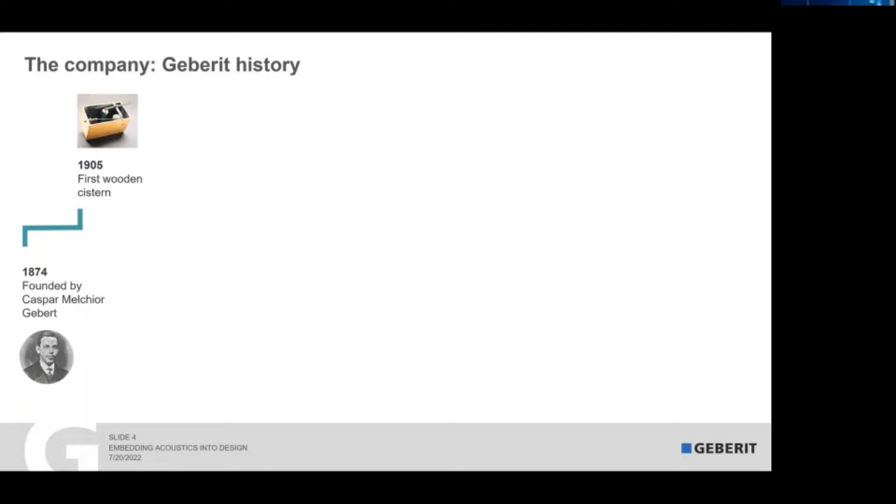Now, I'll take a little bit of time for Geberit history here. As we see, the company was founded in 1874, so we have experience of more than 100 years in the sanitary field, and it was founded by a gentleman, Caspar Melchior Gebert, and then we are the first inventor of the wooden cistern. After that, we had a lot of other developments.

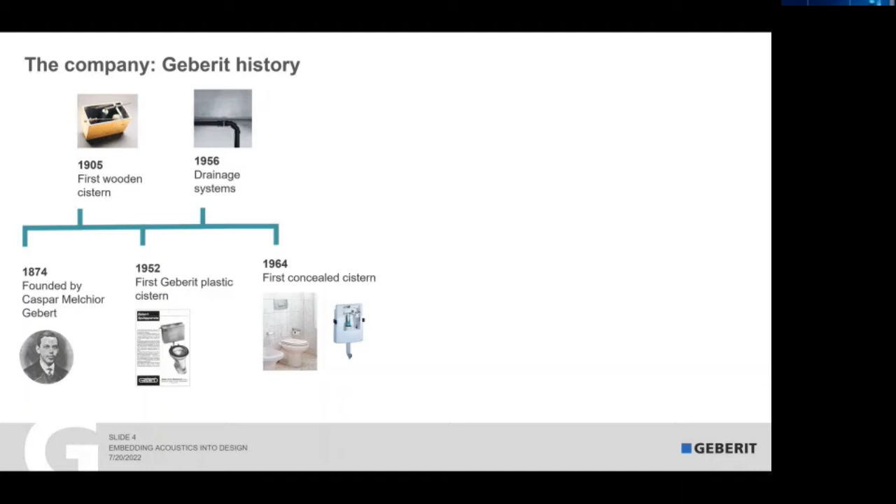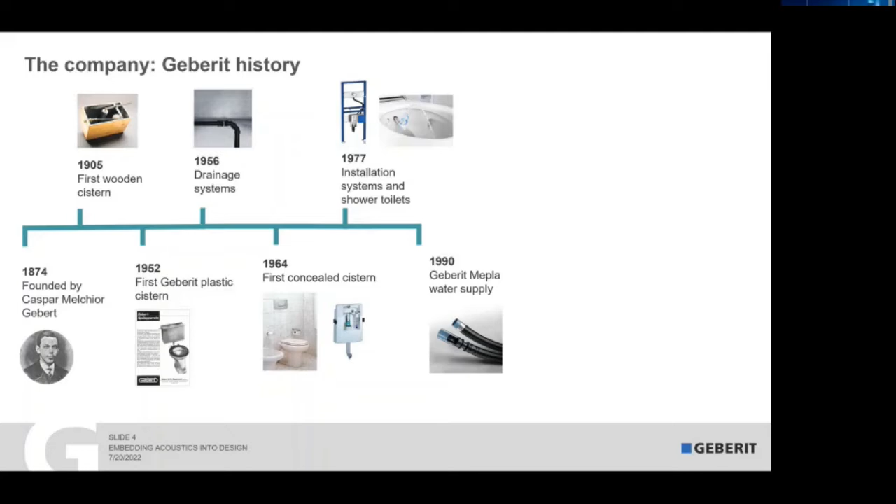Then in 1956, we had a development for drainage systems, then the first concealed systems, and we are proud to say we were the inventor of the first plastic concealed system also. Then a lot of other innovations in terms of installation, shower toilets, water supply systems, stainless steel pipes and fittings, then Geberit Monolith, sensor-based toilets, bathroom, and other products.

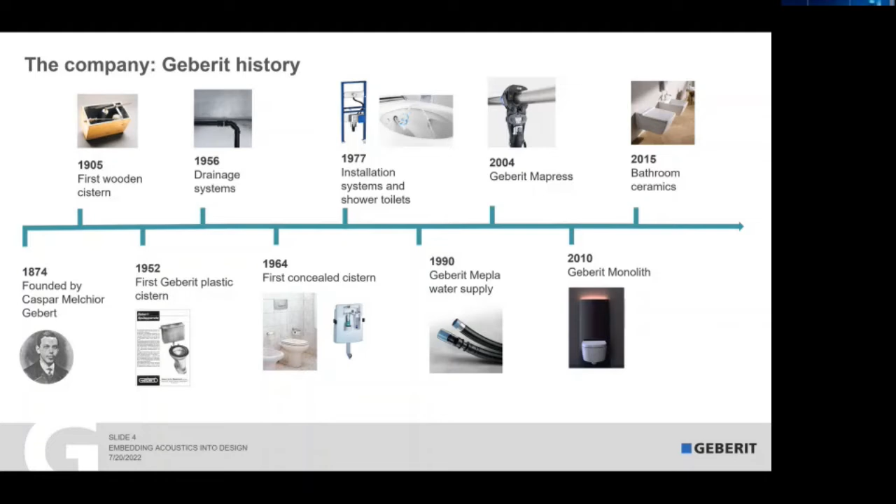So the topic what we see here, nowadays in this region there is more demand for that. And today, what we will discuss is more on the statics and sound insulation part. So this will be a very useful session for us today, where we can see the optimal value of sound, what it could be in a residential apartment or commercial or healthcare building.

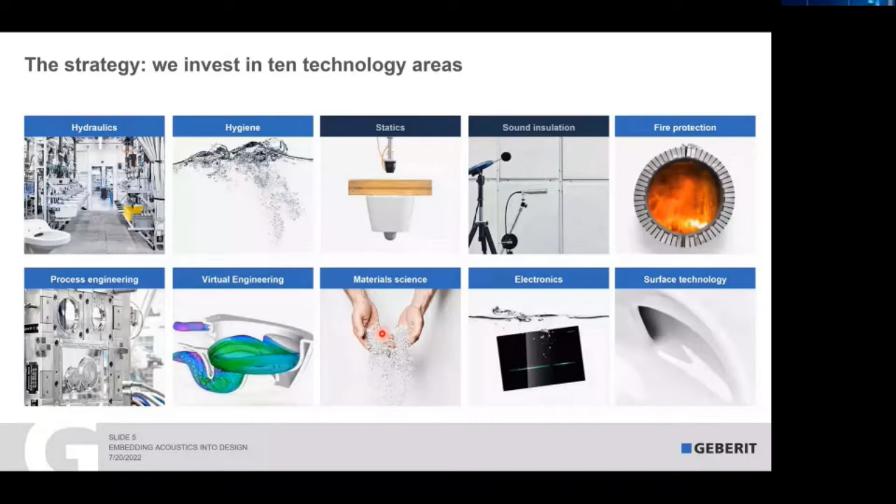Generally in our region, as we know, people speak about several values, less than 20 dB, more than 20 dB, etc. But exactly what is the requirement as per the standard and as per municipality regulation here in this region? We will see more on this part from Mr. Mathias.

One thing I would like to bring to all of your attention is we have a Geberit sound laboratory next to our factory in Switzerland. We have operated this sound laboratory since 1997, more than 20 years. So we have invested heavily in acoustics and fire protection technology for many years.

So now with this, I would like to hand over to Mr. Mathias, where we will learn and see a lot of things in acoustics, which will be useful for our plumbing design segment. Thank you so much.

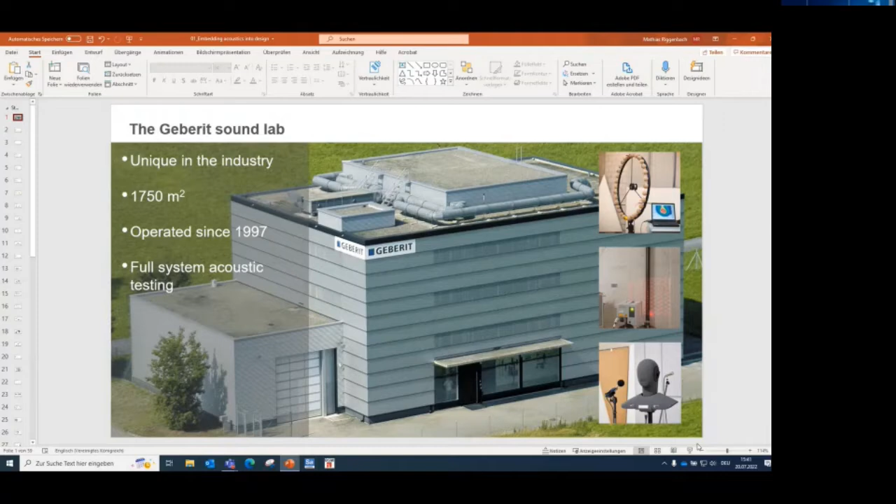Okay, thank you very much for the introduction, Vinit. I'm going to just go to presentation mode. I hope everybody can see my presentation. Is that right? Yes, all good. Excellent. We can see it. So thanks for the excellent presentation of Geberit, Vinit.

I will continue and hopefully give you some valuable insights on the acoustic topic. As Vinit said, this laboratory is very important for us, and there we gained most of the values and experience when it comes to acoustics. So we have huge knowledge and a huge database when it comes to different systems, different installation regulations, and so on. That's, I think, the most important part, where we can gain all the knowledge.

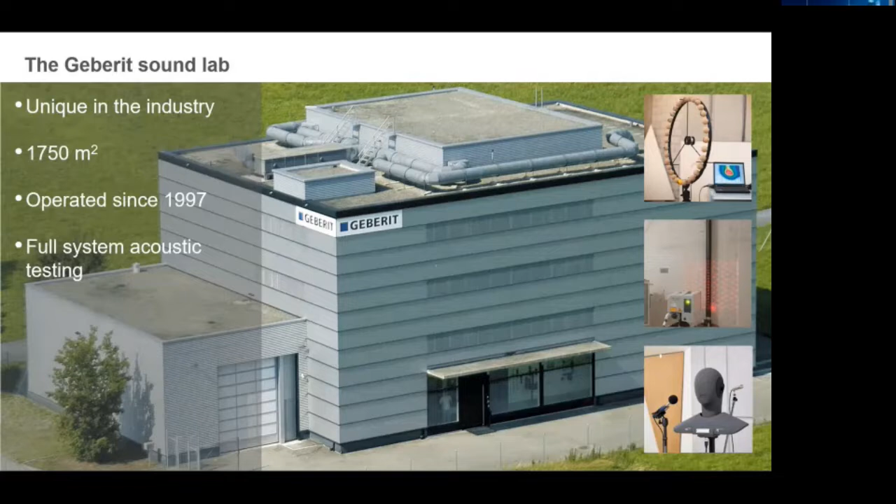So the introduction to Geberit was already done. I want to talk a bit about the basics, so what causes noise, about the dBA level, where it comes from. Then, of course, one of the most important topics, the importance of acoustics in design. The design stage is very important. Architects can do a lot already for acoustics and save us a lot of headaches if they make a good layout of the buildings. And this is one of the parts I would like to address heavily.

And then we will go into the designing, and also some installation situations which are reality or which are good, and maybe some which are a bit less good. And then, as we already said, the acoustic regulations we will have tomorrow, to not make it too heavy, everything in one webinar. So we split it a bit, so it is also quite easy to digest for you.

So when we start, what is sound? What is it actually? It's measured in decibels. I think everybody has heard of decibels. And then the frequency is also very important. This we measure in hertz, and this is basically the length of the sound. Those two values together give the sound. I will play you an example where you can hear that the sound is different. It starts low, and the more we increase the hertz, the sound is changing. So I'm going to play you this example here.

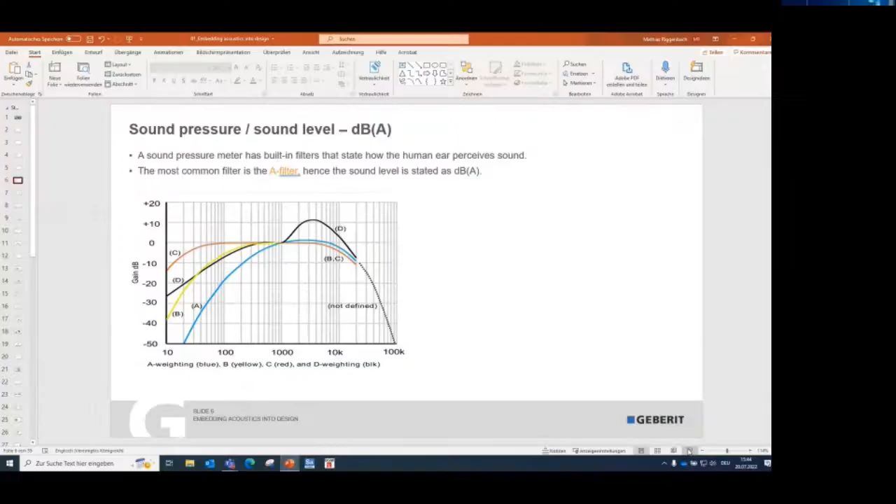Mathias, we are not able to hear the sound of this. Okay. Sorry, I'm going to share. You are not hearing the sound? Still not? No, actually. Okay, I'm going to share again. Sorry for that. If you don't hear, it doesn't really make sense. So I'm sharing again. I think I forgot to include the sound. My bad. So I try again. Now it should work. Yeah. Sorry for that.

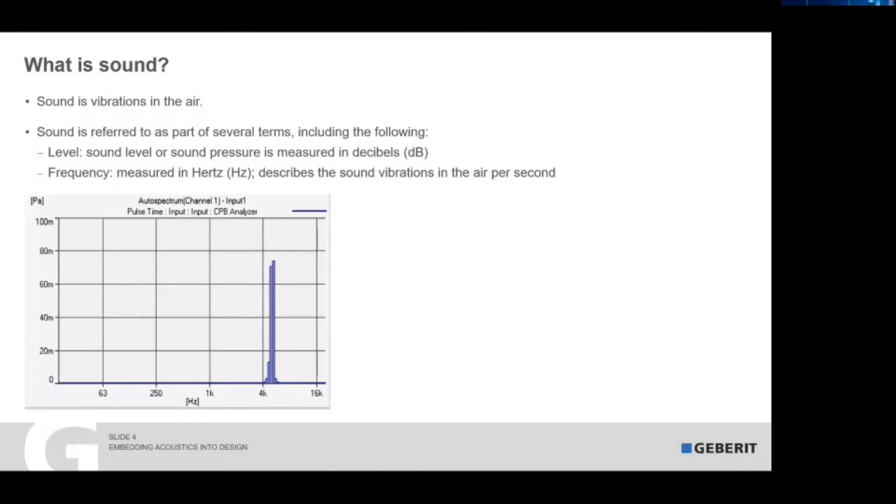So you can see the pressure of the sound and then the hertz, which is changing depending on the range the sound is playing. And of course, the perception for the human being is different when the sound is playing at different hertz. So this was a single sound. On the next example, I would like to play you some sounds which are more familiar to you. You see the dB value will be more or less on the same level, but different hertz spectrums are involved. So you will perceive the sound differently.

Maybe one of the most annoying ones. So also the last one I think was quite annoying. The sound is not what you like to hear, and you see already with the higher sounds, when you have the higher hertz, you perceive the sound a bit differently.

And when we talk about building installations, if it's aircon or pipes or windows, facades, we always talk about this dBA level. I think this is also familiar for everybody. We don't talk only about dB. So this dBA value is an A filter which we use to adjust it to the human ear. The human ear, how it is built, perceives the sound a bit differently.

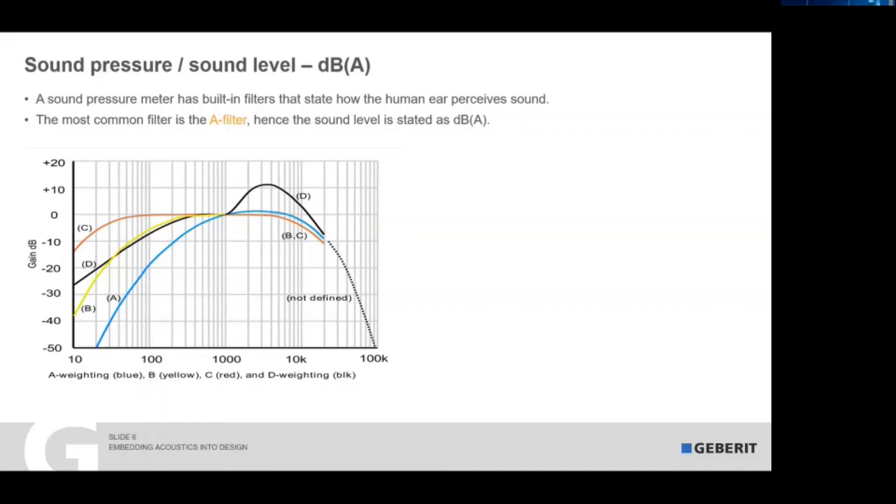Also important when we talk about this noise barometer: for example, with a pneumatic hammer we talk about sounds of 100 dBA, which already have an effect on the ears and could even cause damage. But when it comes to piping installation, drainage installation in buildings, we mostly talk about values around 30 dBA.

We will see this more tomorrow in the regulations, but I can tell you already, most regulations have different stages, but mostly we talk about values between 25 and 35 dBA. Everything below is not or seldom disturbing, and values below 20 dBA are very difficult to hear, even at night when you try to fall asleep. Values below 20 dBA will not disturb anyone when you are quietly at home.

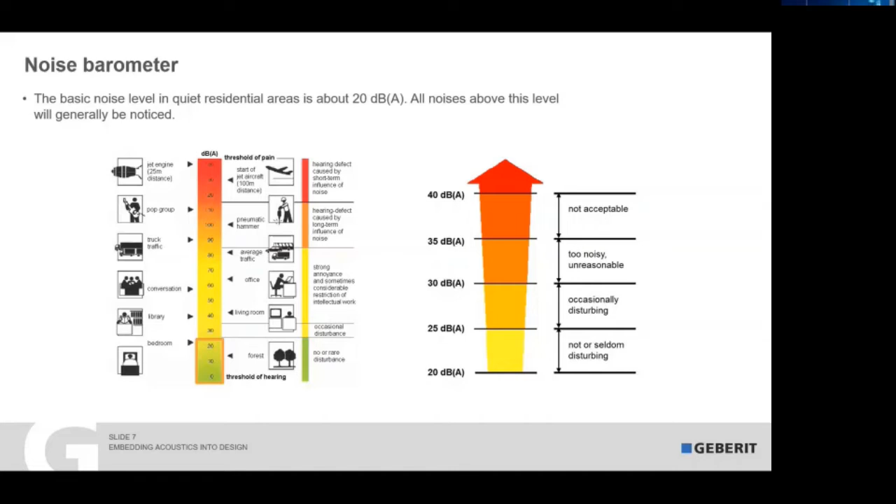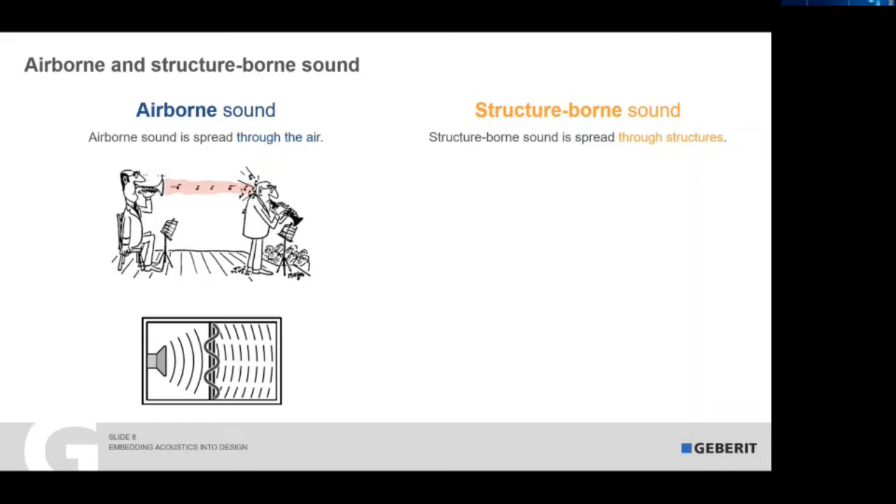So these are some basics which are very important to know, especially this noise barometer and the dBA level. Then also very important, we distinguish between two sounds: airborne sound and structure-borne sound. The first one comes through the air. When I'm speaking or playing an instrument, like the person in the picture, it spreads through the air and reaches another human ear, who then perceives the sound. So when we make a noise in one room, it will go to the wall, vibrate, and then go on to the next room.

Structure-borne sound is more when, for example, we walk around in our home and we have a neighbor below, and hopefully there's good insulation, good decoupling from one floor to the other, so you don't hear when the children or the women with high heels are running around. You should not get disturbed in your flat, or when there's a renovation above with a hammer. So the better the structure-borne sound insulation, the less you hear. This is very important to distinguish when we talk about acoustics.

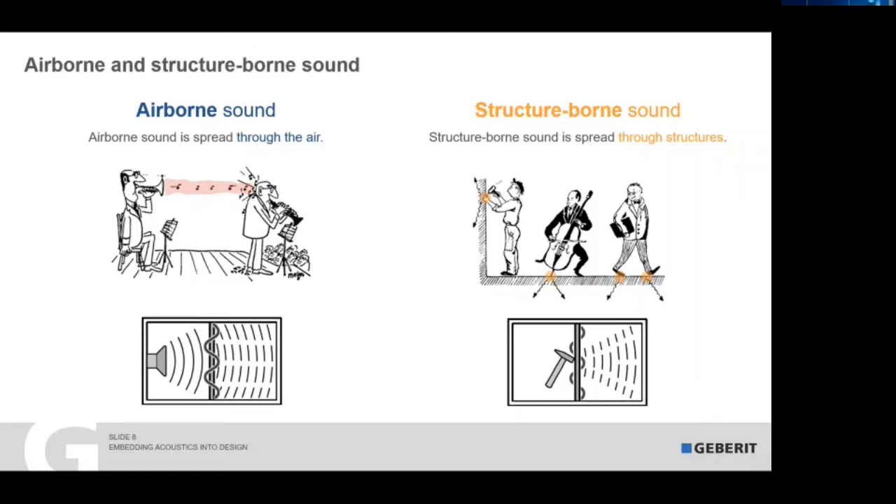Your neighbor next to you, or even in your own room, or the neighbor below, will hear structure-borne sound. The structure-borne sound is distributed over the building, and as I said, it really depends what systems and insulations you use; this has the biggest effect on the sound which goes to the neighbor. The airborne sound is mostly for your own ears when you are standing in front of the toilet, and the structure-borne sound is mostly for the neighbors.

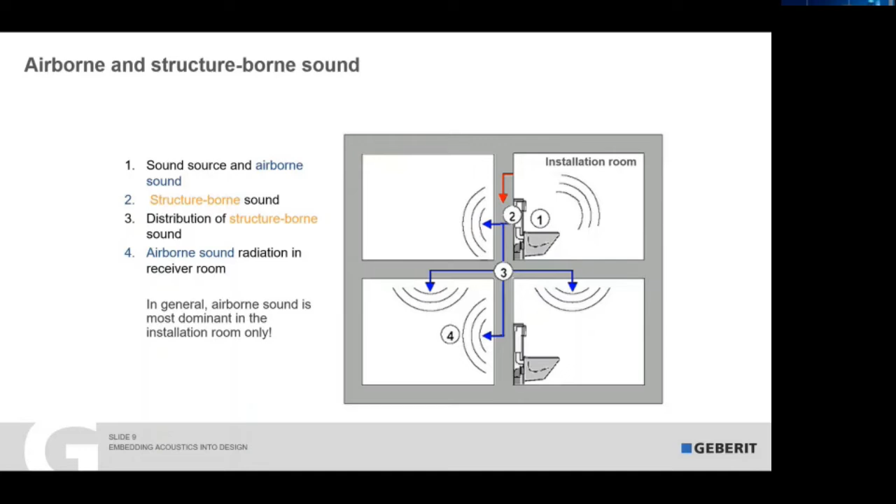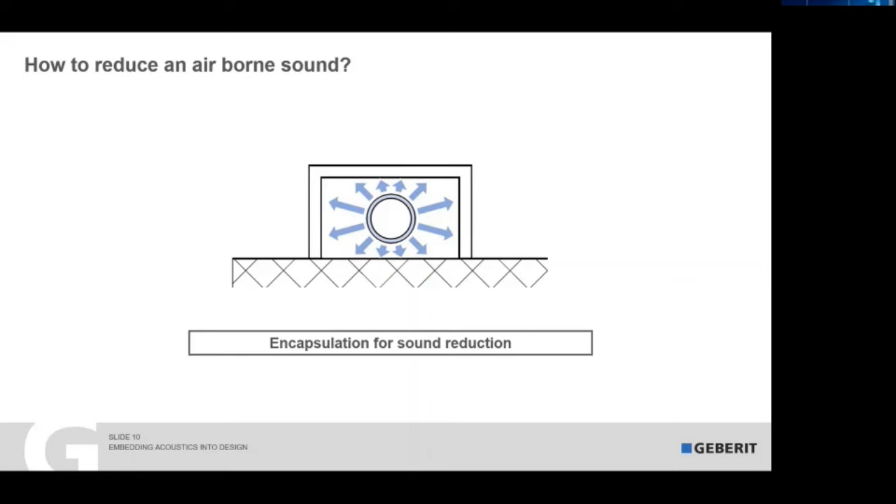So how to reduce airborne sound? Mostly we have a duct, maybe with a pipe. What is easiest to do? Of course, we put some duct around, and then we do not hear the noise in the room. And this is what we do mostly also with a pipe. We put it in a duct, and then the sound will be reduced.

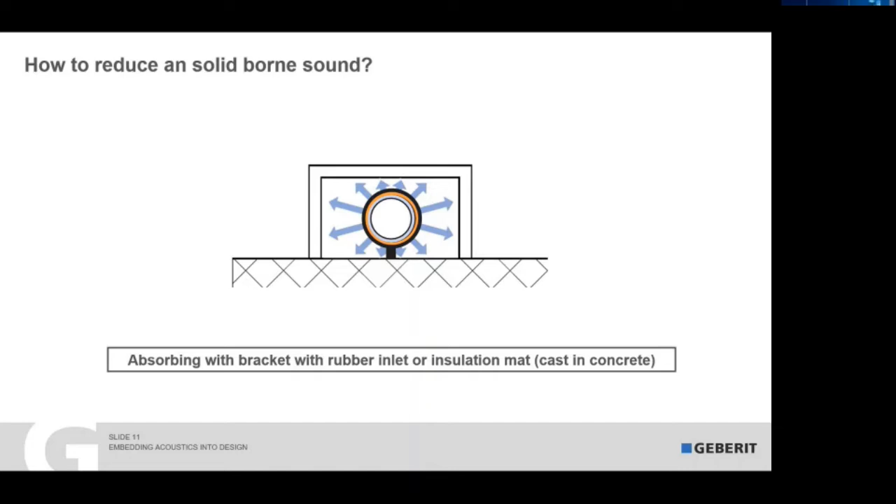So then also a good question, what is noise? Also this one depends. For example, the first sound which I'm playing you here, a Formula One car. If you like Formula One and you like the cars, this is maybe a pleasant sound for you. But of course, for people who do not like the sounds, or the street in front of you where the trucks are passing, this is not a very pleasant sound. And of course, it's also mostly the loud sounds that are not very pleasant.

But also we have the second sound, which is maybe familiar to everybody when you have been to the dentist. This sound is a bit lower, but it can be also very annoying when you hear it, because it's also what you associate with the sound. That's also very important, the loudness of the sound and also what you associate with it.

Then, of course, the last sound, I think everybody has heard, the toilet flush. There, mostly you will have noticed it's not very loud, but when you hear the sound, maybe you associate your neighbor going to the toilet while you have a nice dinner, and this sound is not very nice to hear at this stage. Or you just try to fall asleep, everything is quiet, your neighbor is flushing the toilet, and this sound can wake you up.

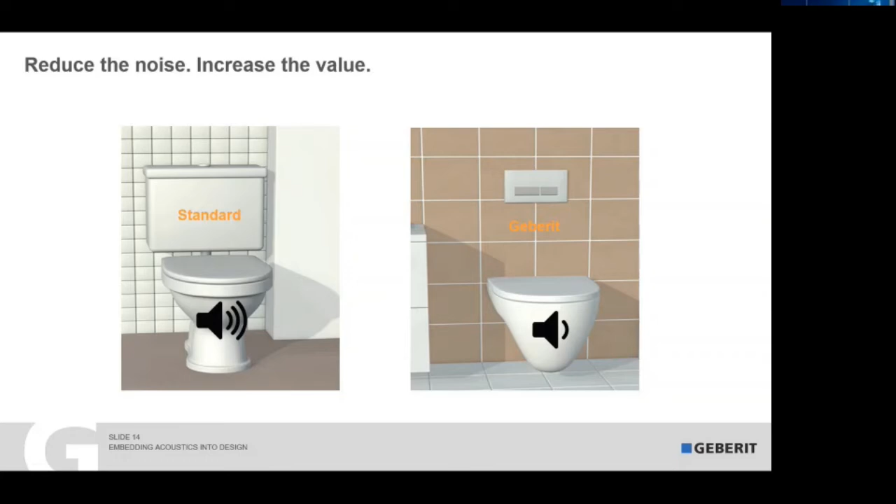Quite some time ago in Germany, we made a questionnaire about the annoyance of sanitary noise. Of course, nobody likes it. Everybody has been disturbed at least once or twice by sound. Sometimes we get asked, okay, I want to have it as quiet as possible. And of course, the more quiet, the more expensive it gets when we talk about the acoustic value. So if you have increased requirements, it's a bit the question of money and how much you would like to spend on your acoustic installation.

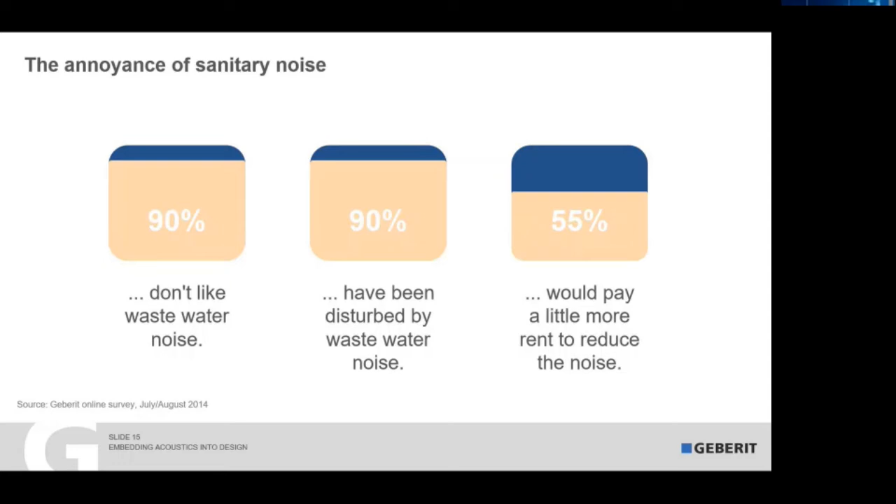But also in private homes, we see there are people who are getting, let's say, disturbed by the neighbors. It's also a topic there, of course. I even found some advice people put on the internet when it comes to noise reduction in private homes, but mostly, especially with solid-borne sound, if you have a problem, even if you put as much insulation around the pipe as you like, you will not get a better sound value.

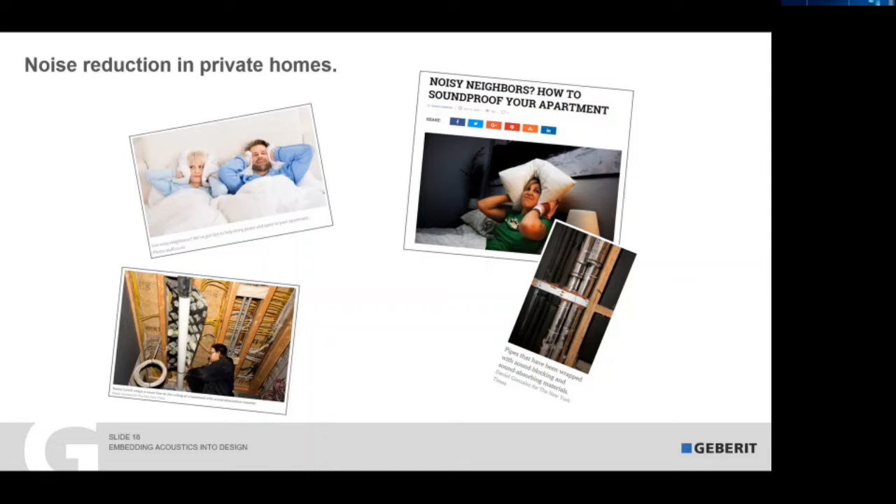So it's very important to start initially with the sound planning, because if you do it too late or just work with insulation for the airborne sound, you will not achieve a good result. And you see here, it can maybe even make your home hard to sell when you have this noise problem.

So then I spoke about the cost of noise reduction. Of course, if you look at the pipes and the installation system, there's a different pipe involved, there's a different approach generally with the system involved. And this, of course, has quite some cost when you only look at the pipes.

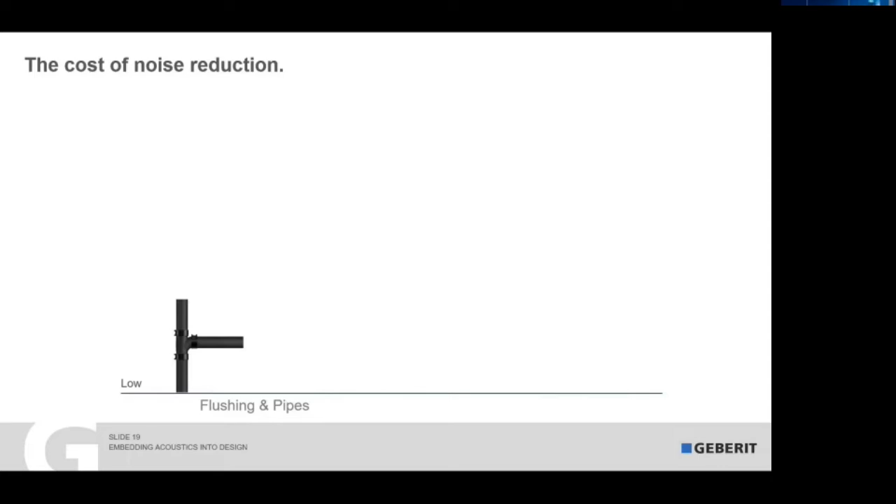But what we always ask when you do a building: look also at the floors, walls and ceilings, and the doors and windows. Because if you do not have the budget for good windows and good floors and walls, and you live in a big city and hear the outside traffic even more than, for example, this 35 to 40 or 30 to 45 decibel, then why should you even make acoustic regulations for the pipes? So I think this is very important. When you do buildings, check: do you have the budget?

And then also check, or even more important, I would say, is really the building structure, and if you have a train passing in front and so on. There are a lot of regulations in place. This is even more important than the inside noise. Because the inside noise got importance in Switzerland when it started in Germany.

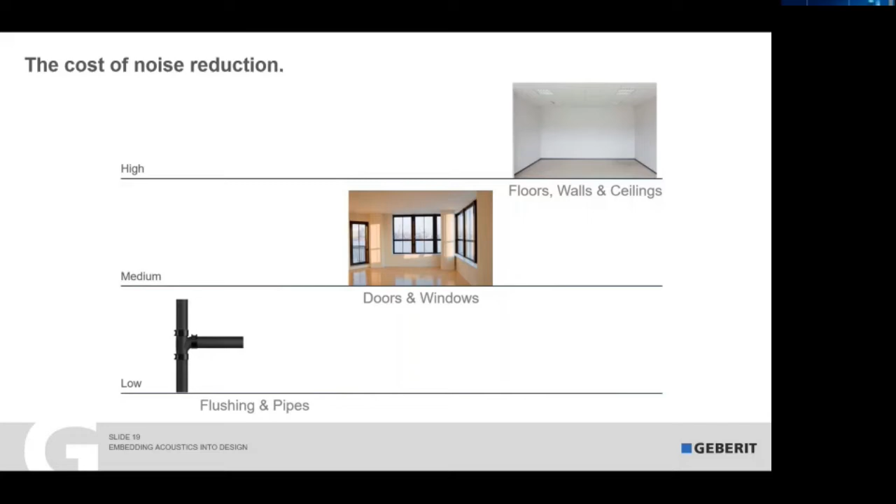You know, we are cold countries, and initially we had insulation on the facades of 5, maybe 8 centimeters, and nowadays we put 25 to 30 centimeters of insulation on the building. And this makes the inside of the building very quiet, and only then will you start to hear, for example, the toilet flush and so on. So the whole building, the whole approach, always has to be considered. And only then do we say it makes sense to consider the whole piping. And then, in the full cost, the piping is a smaller part of the whole building.

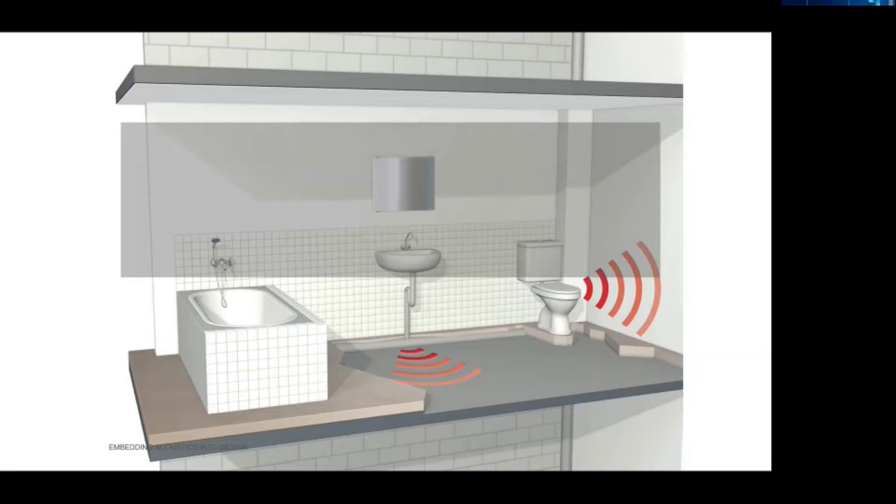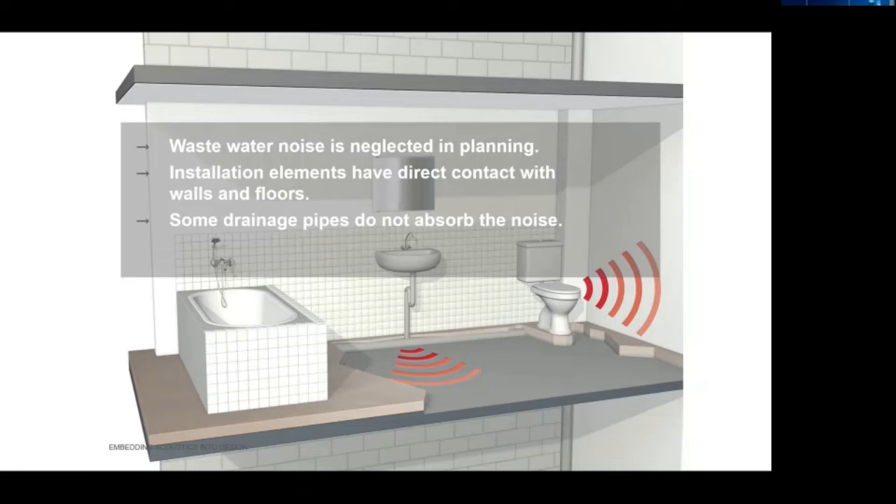But what mostly happens in reality, when we look at the piping, is that wastewater noise is neglected in planning, so it's not a standard in most countries when you do planning. Then installation elements have direct contact with walls and floors, so we have floor-standing toilets, all the pipe is connected to the building structure, maybe even brackets without any insulation and so on. We mostly talk about the pipes, of course, but maybe surprisingly to you, the pipes are maybe the last thing you should think about when you do acoustic design.

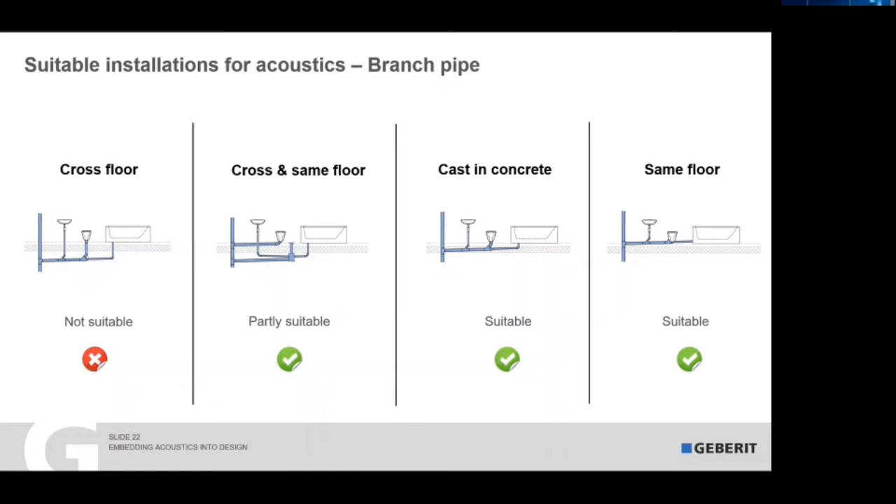With the cross floor installation, of course, you can also do something like this, but it's very expensive. You have to spend a lot of money on pipes and then also on false ceilings, on acoustic ceilings, and this would be quite expensive. So also there we recommend to go out of the zone where the acoustics are important and make the proper pipe installation.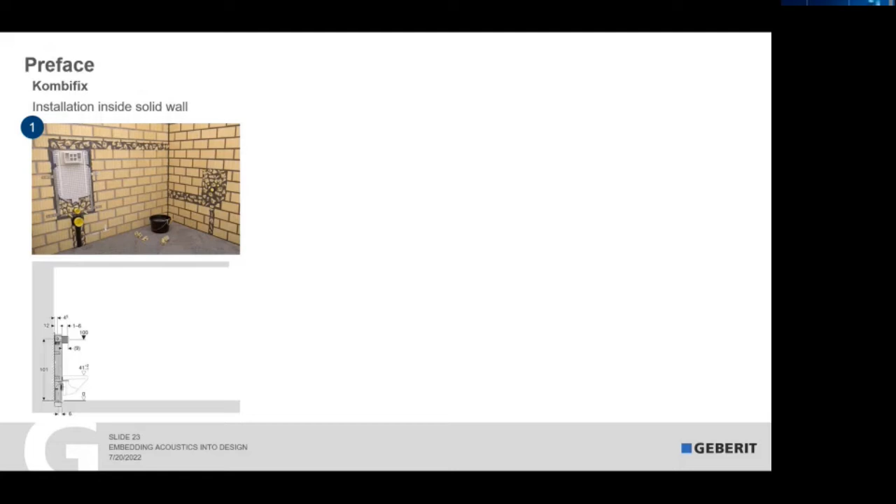So also we see it here. For example, when we talk about the in-wall installation, here we have direct contact with the building. This is a kind of a Kombifix in-wall cistern, which we also have in the offer. This is a good product, but not when we talk about acoustics. Then we better go with our pre-wall system, which is called GIS, or Duofix system. Or, of course, every concealed system can also be installed with a Knauf system. I think Knauf system is quite popular. Gyprock maybe is known in your region, I don't know.

But when we talk about acoustics, we should always go in front of the wall, take all the devices which make the noise away from the wall, and make the whole system installation like floating in the building. So you can also see here, on the cut, there's no connection to the back wall of the building, and also the devices are decoupled. Like I always say, the whole installation, not only the pipe, should be kind of floating in the building, and not as we have it here attached to the building. This creates a lot of solid-borne sound.

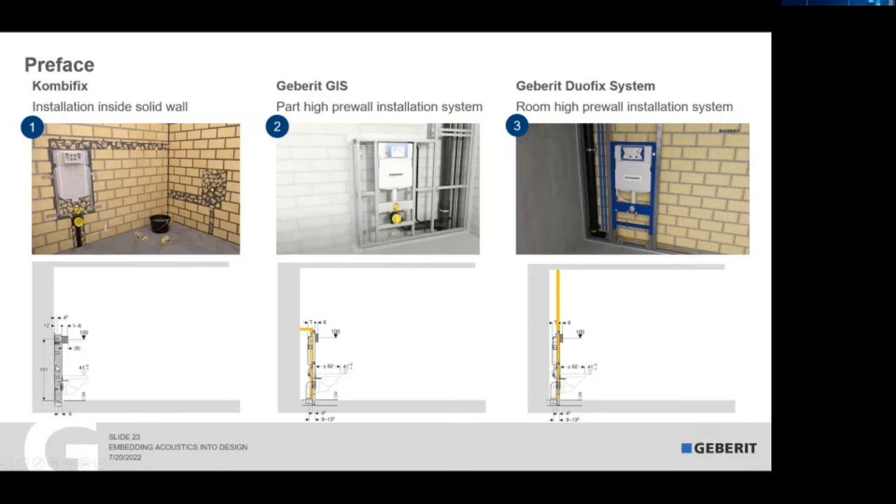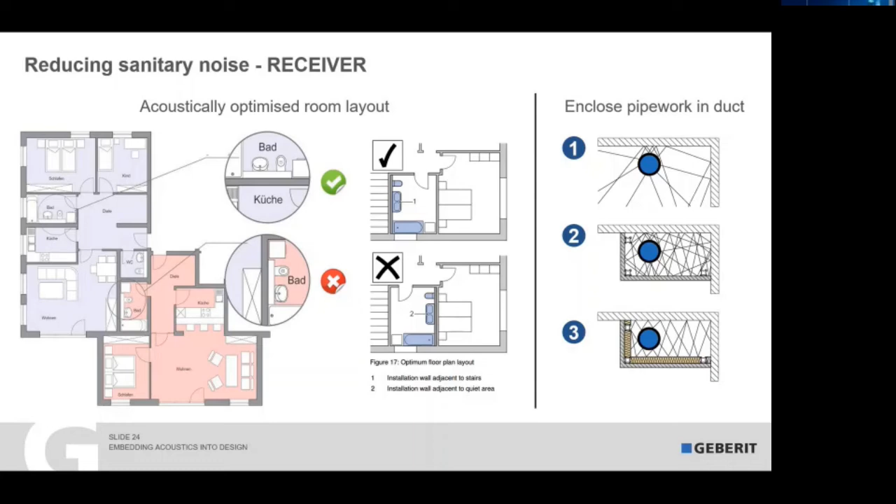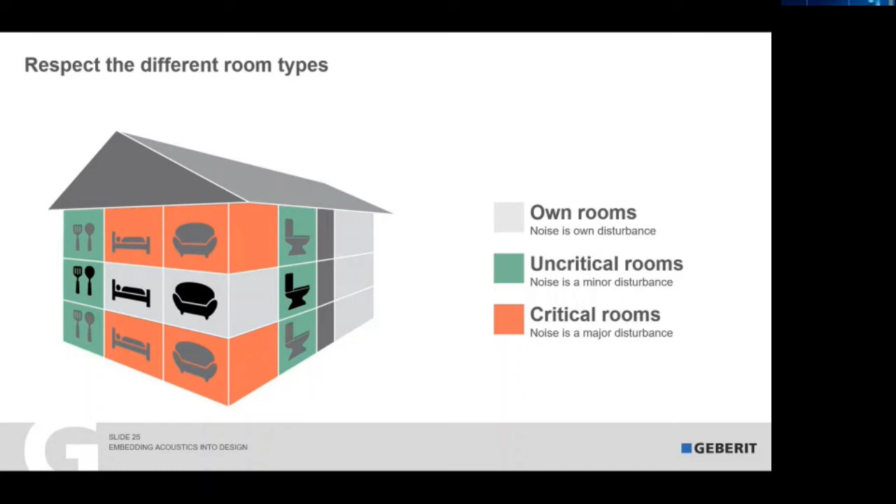So also here you see it's not only the rooms on the same level, it's also diagonal. And this is mostly the most critical room here, the diagonal room, where you're getting most disturbed. And when you can make a design where the whole installation is not touching critical rooms, then you do not even have to consider any acoustic regulations. So here you see the critical rooms, and also in your own rooms, there are no acoustic regulations which you have to consider. So also there, for example, in the example before, when you mount the kitchen and the bathroom together, that is actually better for the whole installation hydraulically, and also uses less pipe material. Not for Geberit, of course, we like to use a lot of pipes.

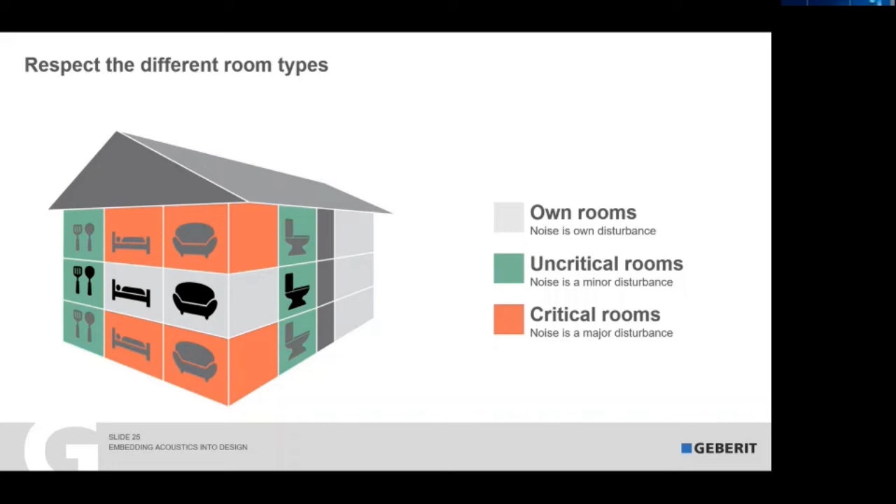When we come to the full installation, we always say use a wall hung toilet. When you put the toilet on the wall, there's no traveling directly through the floor when you flush, and the whole element on the wall serves as a decoupling from all the other areas.

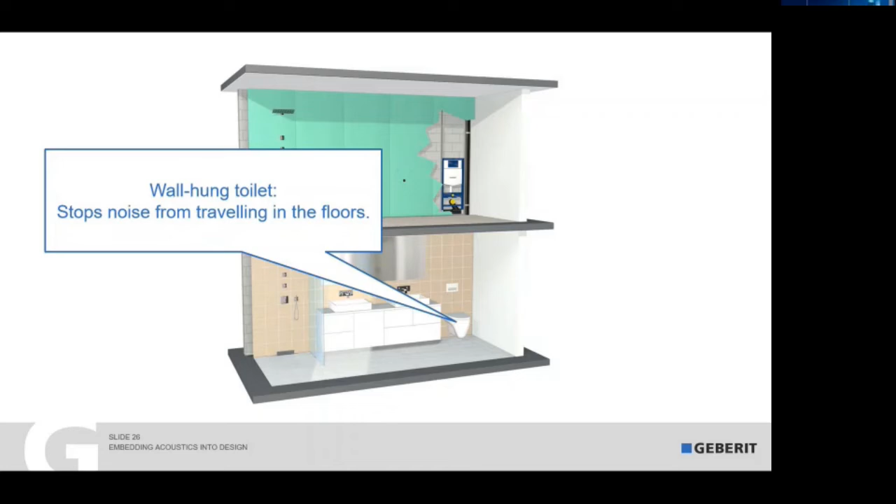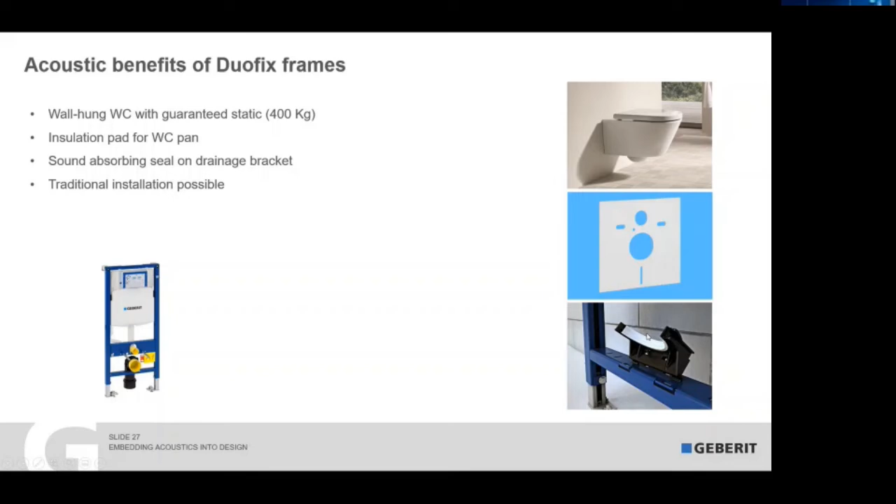So you see here we have these frames, and also this pad here. This is actually mounted behind the ceramic and serves as a bracket to get rid of the solid-borne sound. Also, the connection band to the toilet, which is in the frame, will absorb all the sound that could potentially go to the neighbor.

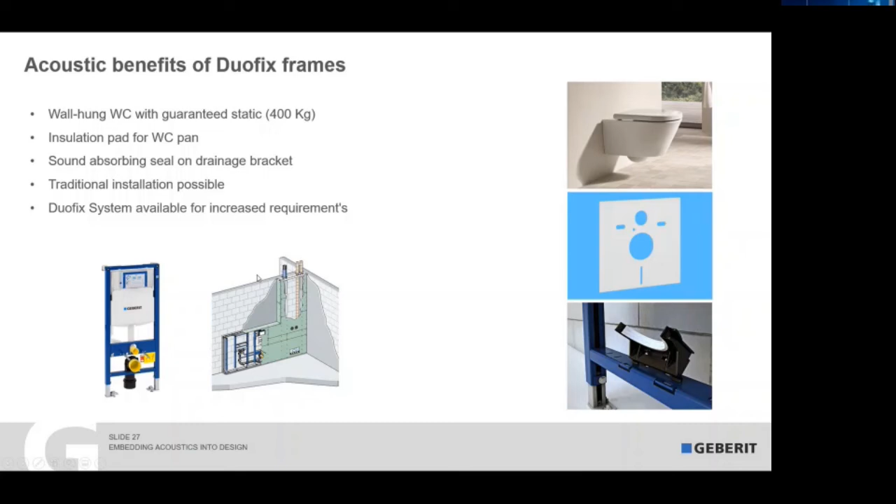Depending on the requirements, you can work with a traditional system like Knauf, Gyproc, whatever. Or, depending on your requirements, you can also use the full Geberit system. This is what I'm showing you now here.

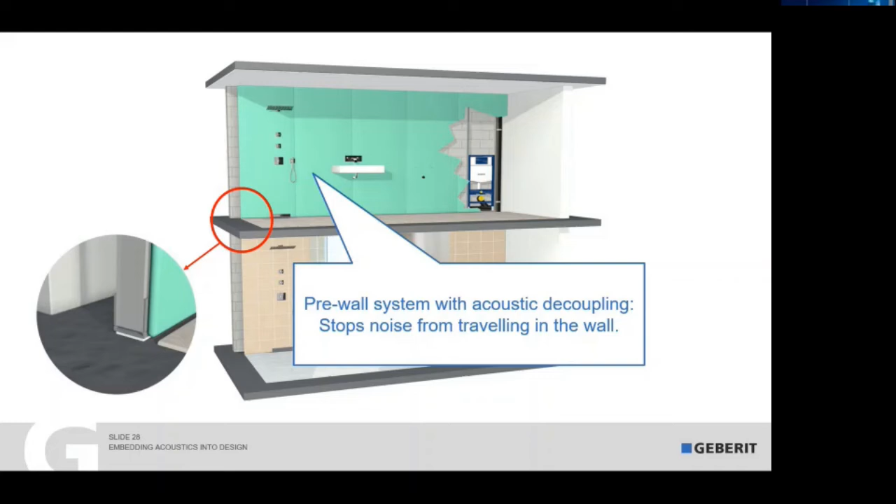With the full system, it's important that you decouple the whole wall. This whole element should be flying in the building and should be fully decoupled from any wall or floor from the building. Like that, we can ensure that none of the sound is traveling to the neighbor apartment.

When you have considered all that, a silent drainage pipe is also very important because there you reduce the noise at the source, and depending on the level you want to achieve, different options of pipes are available. But even if you have a good layout and a good installation, I think that's even more important than the pipe itself at the end.

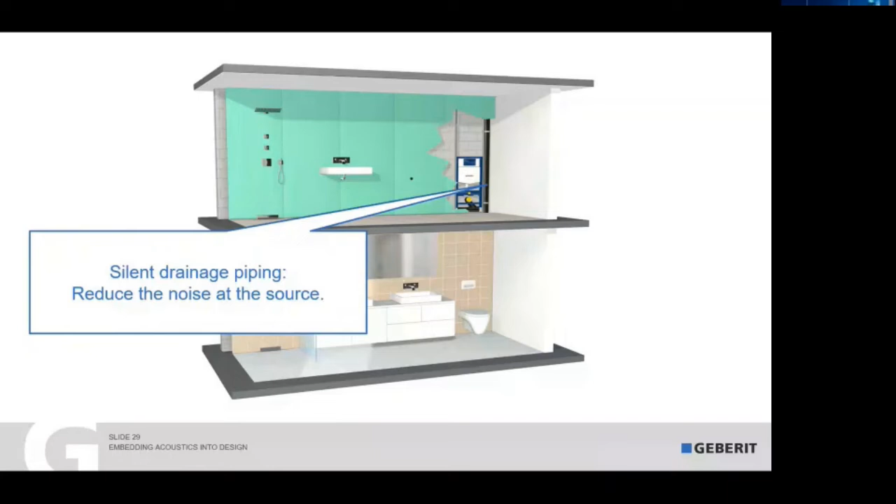There's a lot you can do before we talk about the acoustic products we have in the basket. Here we have, for example, the special acoustic pipe, which is a bit heavier than a normal pipe. We add some mineral reinforced polyethylene, which makes the pipe heavy, and then makes it more sound approved than a normal HDPE pipe.

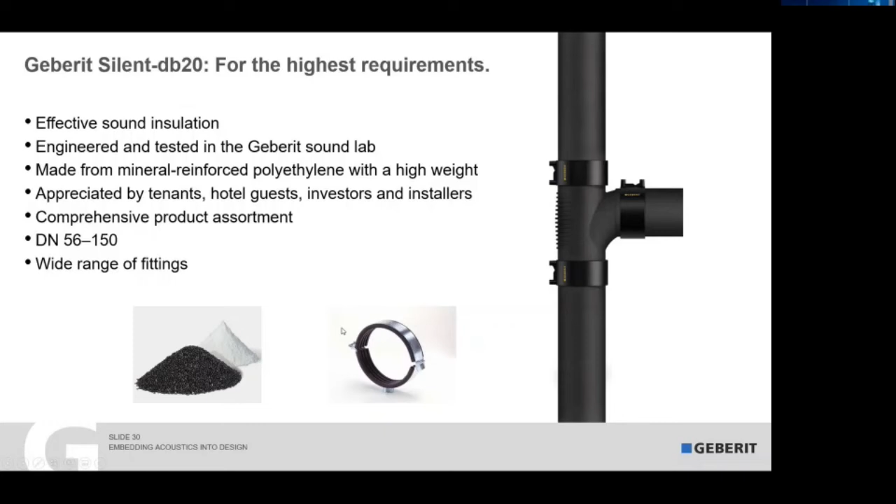Very important also are the brackets, so we can get rid of the solid-borne sound. But also there, very important is the installation.

Even if you have done all right, have a good design, considered everything, have a good duct, insulated it, have the right pipes - the most failures we see are always during the installation. If you've done everything perfect, but for example here you see some cement on the bracket, this is a direct sound bridge to the building, and this can cost a lot of money when you do not consider this well.

Everything is already installed, maybe nobody realizes during the installation, and then what can you do if customers are not happy? You have to open all the walls. They are already living inside, and then it just gets very expensive.

So again, plan from the beginning, and during the installation, always check: Is it properly installed? Is a bracket missing? Did they work maybe a bit quickly? Did they use the wrong bracket without insulation? Then the whole installation, or the sound values, will be on a higher level.

For this we also have Mr. Vinet and other colleagues in the region. If you have projects there, we consult you. We also come and show you which points you have to look at when it comes to the installation.

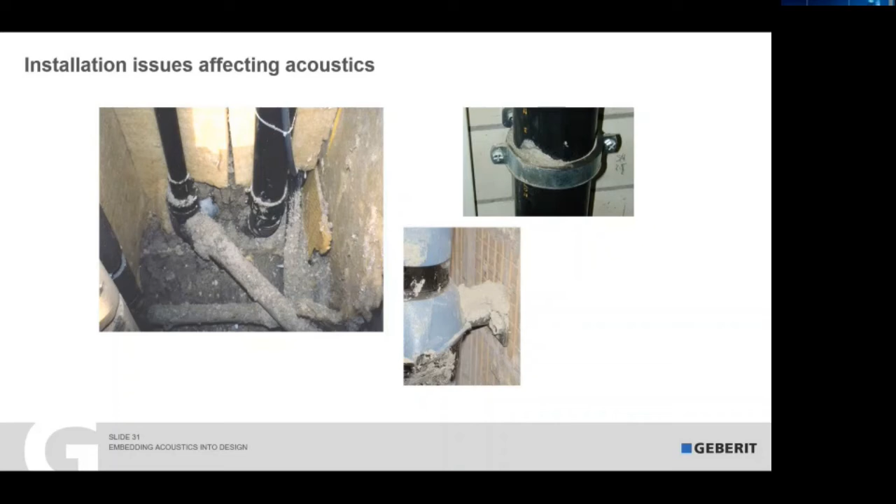Something also many times done wrong is on the offsets. When you use 45-degree bends, this also causes an increase when the water hits the bend. If you use 15-degree offsets or no offset at all, this also makes better acoustics.

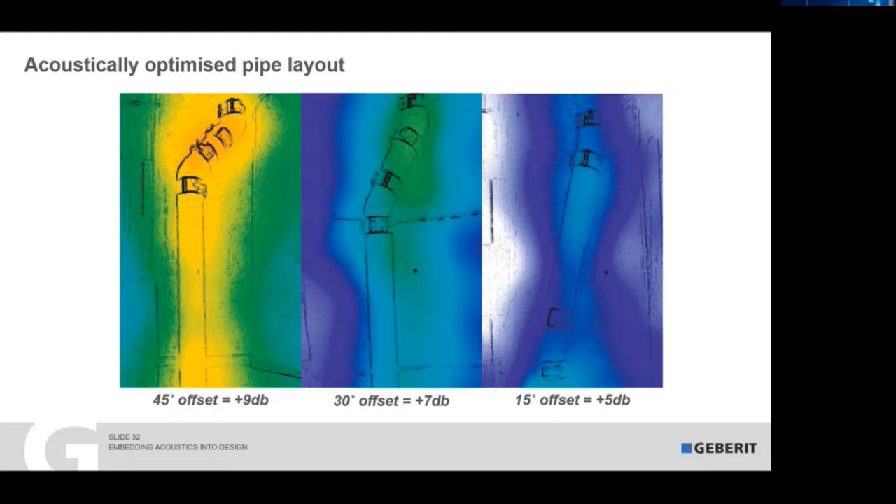There are many other things within the installation where we can support you afterwards on the building side, and also share our knowledge on this.

So that's more or less it for the first part - a bit of the basics, which I think are most important even before regulation. If you consider those basics, especially the layout, choose the right products, and make a good installation, nobody will complain. You will be within most of the standards, but there are also increased standards, and then it gets maybe a bit more difficult to reach some values.

But about this, I would like to speak tomorrow about the regulations, and this is basically the standards we are going to talk about tomorrow - the German standard, which is the most advanced in acoustic installation, and also the Swiss standard, the SIA 181. It's a very strong standard, many things are regulated there.

The same with the Austrian standard. Then, I would say a bit weaker is the British standard, which does not define too many situations or measurings.

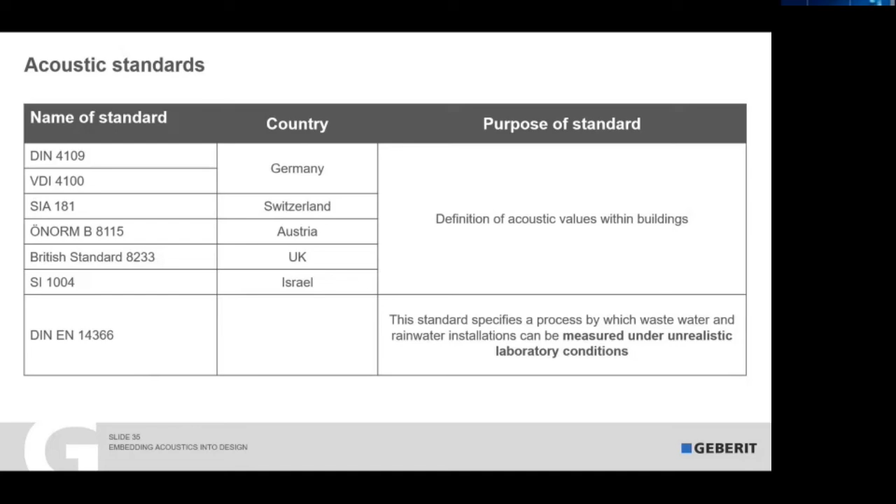And then also we know from Israel we have standards. This is also important. Those are standards, and then we also have some standards which are not defining values. They are defining measuring of the pipe. So this DIN EN 14366, they are not defining, for example, the 30 dBA. They are measuring pipes in a laboratory condition, and they give them values which are mostly below 20 dBA, even sometimes below 10 dBA. And this, in our point of view, is not really helping you when you do a building. But on this we will speak tomorrow.

I think we go now over to the Q&A session, and I think I will give back to Giovanni, and I hope there are a lot of questions.

Great, thank you very much, Mathias. That was a very good insight in terms of acoustic. We have a few questions from the panel. Let me just skim through them.

There's a question from Yogesh, specifying DB20 silent pipes. Will that help in reducing the noise level?

May I start? Maybe you can take the next one. Yeah, so please. No, to be honest, even sometimes the title of our pipe is not very well chosen.

To be honest, sometimes people think when I take DB20 pipes, then I reach 20 decibel. That's not the case, and I have to emphasize on this. Of course, it will help, but it can only help when the basics are right. So what I explained to you, when the layout is right, when the installation is right, then of course the pipe will help. If you choose a DB20 pipe, or whatever acoustic pipe, but you have a wrong installation, a wrong layout, then it will be even worse than if you use a non-acoustic pipe.